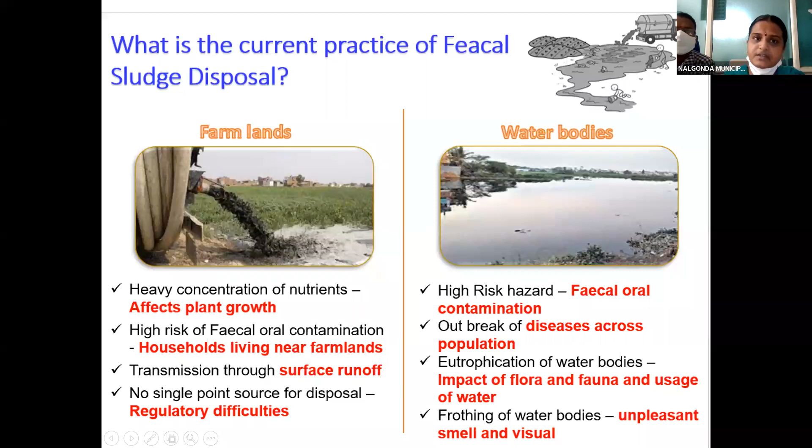If fecal sludge is treated - this is our fecal sludge FSTP located in Nalgonda municipality - if fecal sludge is treated properly, it can be utilized.

There is need and preference for how important it is to people, how this reduces smell and improves the visual display of outputs. Our major interface is zero sludge disposal, to reduce health and environmental risk.

We have a very centralized, dedicated place, easy to regulate from our ULB to the FSTP. This gives economic viability, getting revenue generation from end products.

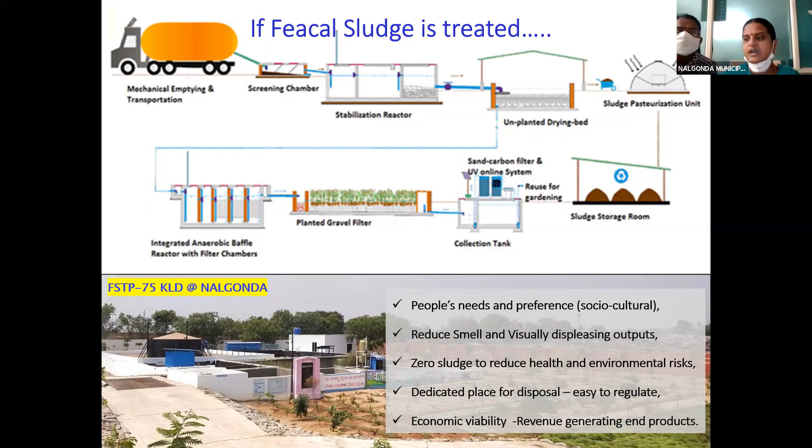Majorly, our project objectives are basically to establish an independent fecal sludge treatment plant as a pilot project, to ensure good O&M of sanitation infrastructure, which leads to reduction of risk to public health and environment.

To treat sludge to prescribed reuse standards, to produce hygienic and safe byproducts for reuse. A major objective of our ULB regarding the FSTP is to achieve the vision of making urban areas ODF, and we are in the race for GFC 3-star rating.

To achieve our strategy based on the policy of Telangana State G.O. MS. 176, the FSSM policy, which was enabled by CDMA Telangana State.

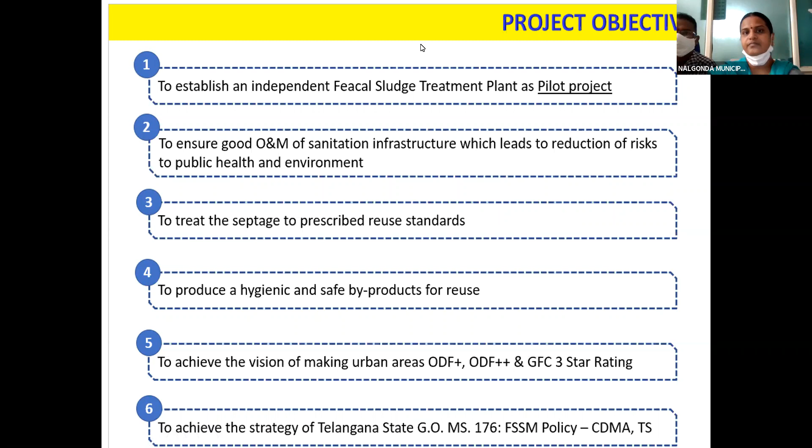So moving to our basic infrastructure, the Nalgonda profile: we are located 90 kilometers southeast of Hyderabad, the capital of Telangana. Our civic status is special grade municipality, an Amrut city.

The population comes to present about 2 lakh population. When coming to our area, it's about 105 square kilometers. We have covered about 48 wards, a vast area in total.

When our toilet system is functional, we are the ODF-free city, and also if you see the water supply and sanitation status, we have 100% coverage in the AMRUT city. Coming to the urban underground drainage system, under the UIDSSMT scheme, we have proposed

2 STPs, treatment plants, which have models of WSP and MBBR. In WSP, it is about 17.16 MLD capacity. Since this capacity, we have covered total core area completed, but still it is in the functional stage, like we are collecting the sewage from all the wards and bringing it to functionality.

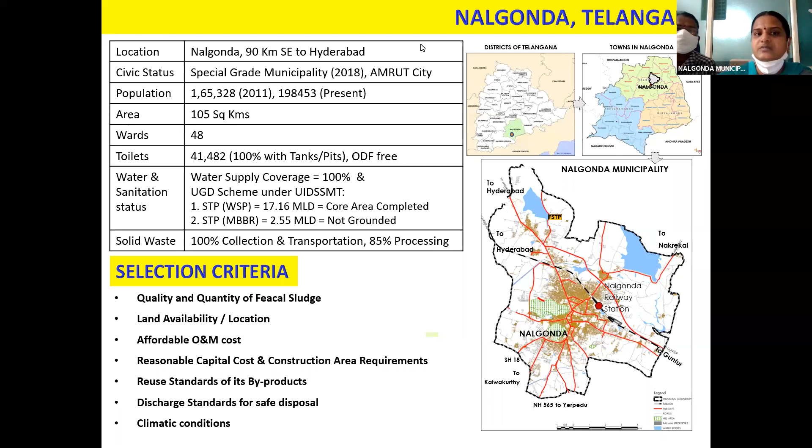Please look at the site's layout plan, where the site area is about 1 acre and the plant area covers about 840 square meters. Coming to the capacity, our FSTP capacity is 75 KLD, and the site developer is CGR JV Private Limited, a Hyderabad-based contractor.

The development mode is PPP mode on DBOT hybrid annuity basis. It is a lease period of 10 years, which we are contracting with them. Compared to the capital expenditure, the total site FSTP has been constructed within a capital expenditure of 1.75 crores, and O&M is expected for the first year to be about 0.85 lakhs.

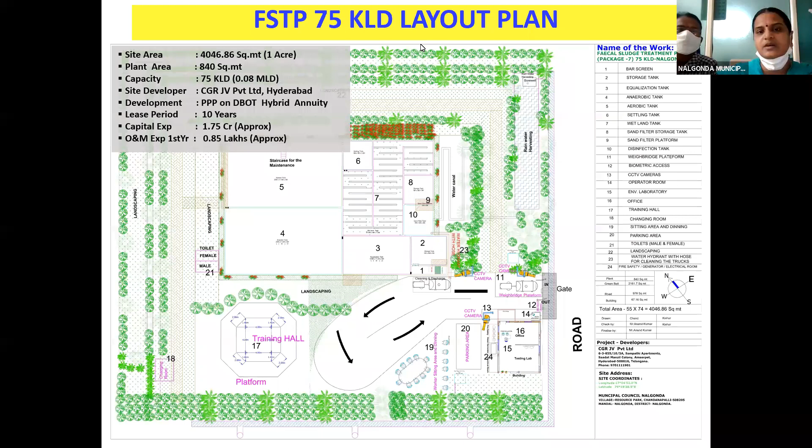Coming to the treatment approach, we see the treatment procedure starting from the equalization tank to the anaerobic tank, later from the E-cell reactor to the aerobic biocleaner tank, the functioning system and the biocleaners, where we are focusing on zero sludge treatment. In the E-cell reactor, the COD levels would be decreased up to 70%. Coming to the biocleaners, COD would be decreased from 70% to 95-97%, where we could finally give only zero sludge from the treatment, the output being only zero sludge.

Maybe a slight, less sludge would be produced, but it is not much in terms of utilization. But the treated water which we are using from the treatment is 90% utilized for us.

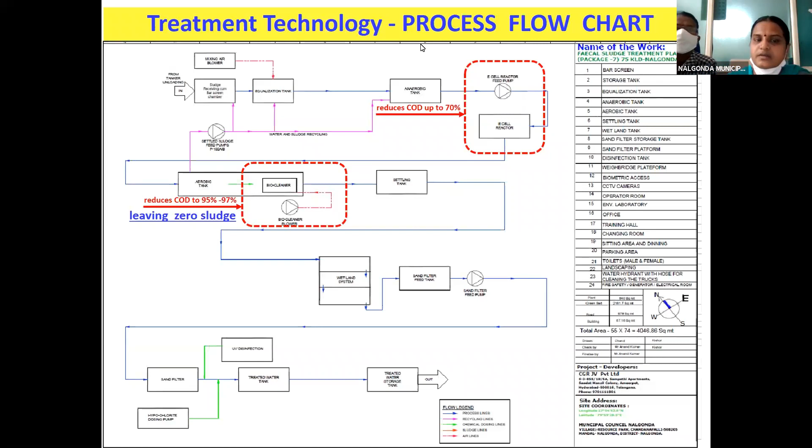When coming to our present treatment procedures, there are 9 stages of treatment where the major aspect is how it is designed for zero sludge procedures, and the operational timings where each treatment procedure is functioning, including the HRT rates.

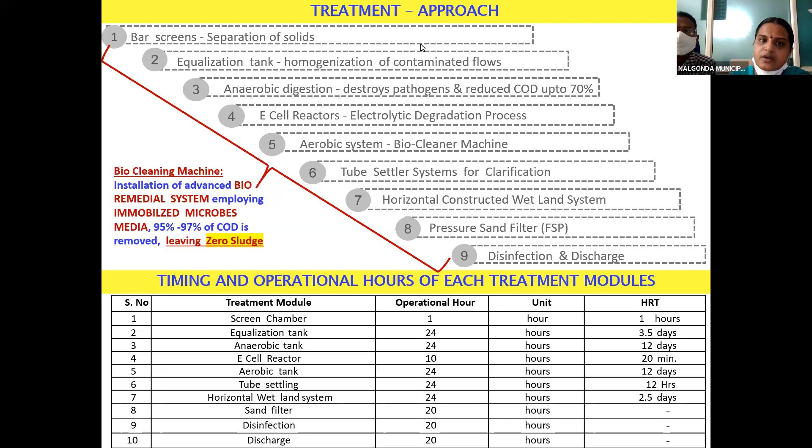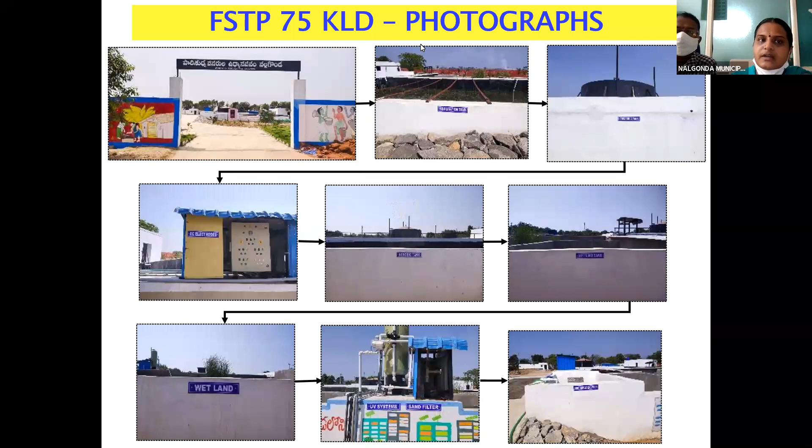Let's go to the screens, how the functionality works from screens to equalization tank. Coming to the bar screens, these mechanical filters are utilized, and the equalization tank has two main objectives: flow control and homogenization of contaminated flow, where coarse diffusers are installed at the bottom and blowers are installed on the surface for agitation of the contaminants coming into this equalization tank.

The main specialty of this equalization tank is that during peak hours, the septage comes at high rate. While the septage comes in, this equalization tank stores the septage in its chamber and lets it out during non-peak hours when there is little incoming sewage.

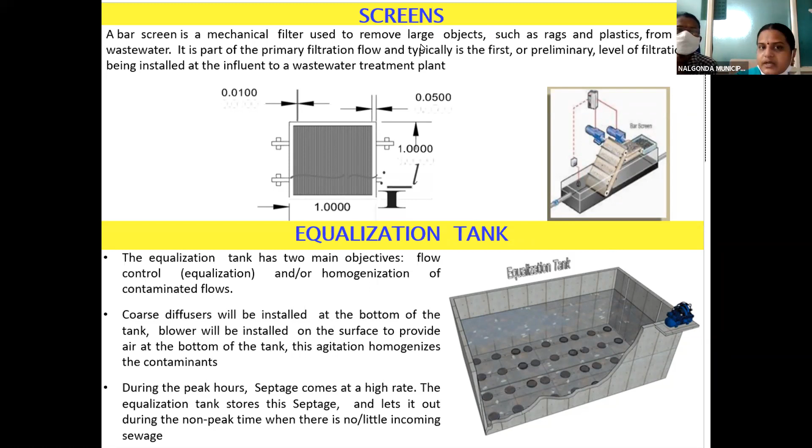Coming to anaerobic digestion, it is a collection of processes by which microorganisms break down biodegradable material in the absence of oxygen. In this whole process, the solids are decomposed into stable substances. This digestion reduces the total mass of solids, destroys pathogens, which finally results in reduced COD levels up to 70%.

When we consider anaerobic digestion, if we take about 100 kgs of COD influent, from 100 kgs of COD influent, it is processed in the anaerobic digestion.

It releases about 40 to 45 cubic meters of biogas, and effluent will be 10 to 20 kgs of COD, leaving 5 kgs of sludge, leaving about 70% of methane gas.

When coming to the E-cell reactor, it is a degradation process for destruction of organics in the wastewater and removal of the same as suspended impurity through the combined process of electrolysis and electrocoagulation.

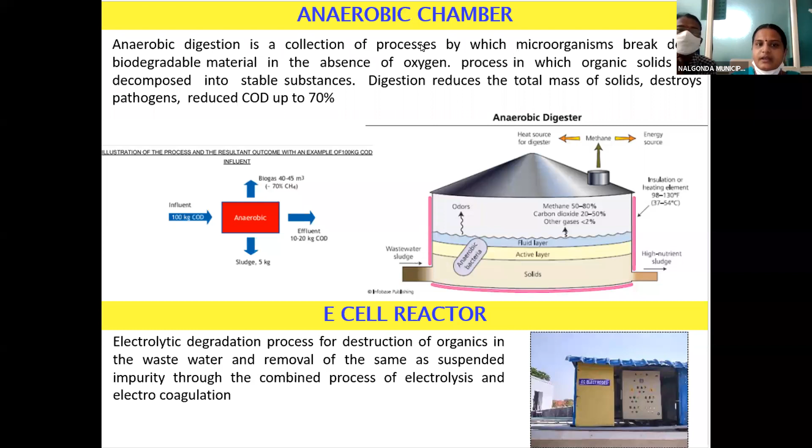This comes to the aeration tank, which functions at the heart of the treatment system. The bulk of treatment is provided here, employing microbes and bacteria for the process. As I explained before, in this same section the COD levels would be reduced from 95 to 97%, leaving zero sludge, which is the main content of our treatment plan.

Like we are releasing, leaving only zero sludge. So coming to the effluent of the aerobic tank, it is channelized to tube settling tanks, and returns are provided to the equalization tank and anaerobic tank to provide partial treatment process. In this process, these microorganisms are facultative and they can survive in both presence and absence of oxygen.

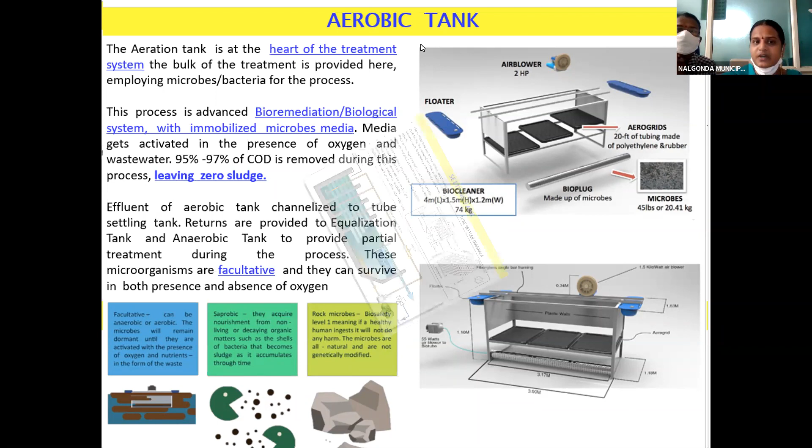Next, coming to these settling tanks, these tube settlers are the main system where the available suspended solids in the treated water separate automatically from the liquids. Through these tube settlers, these solids are separated, and this is the main content where we could get treated water.

There is one inlet channel to the unit. A lamella pack is installed at the both sides of the inlet channel. Automatic air pipes are provided at the bottom of the tube settling tanks. At the bottom, there will be sludge grit sedimentation chamber is provided, and the outlet is provided on the other side of the inlet.

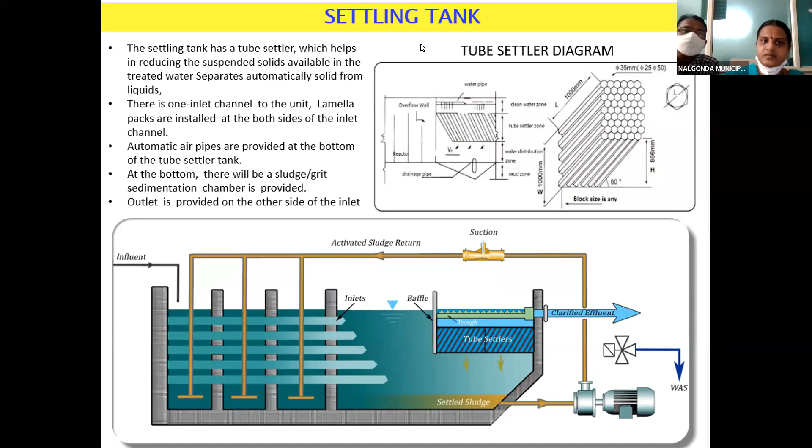Ma'am, sorry to interrupt you. Could you please continue the next procedure? It's horizontal subsurface flow, sir? Ma'am, could you please conclude the presentation because we are running out of time?

Majorly, the O&M which we are concluding is power consumption. We have installed about a 15 kW solar power plant under the net metering scheme, which will generate 67.5 kilowatts per day. Since it is a pilot project, the developer is also planning for solar street lights yet to be installed, as it is in the plan.

They are about to make it within 2 months. It saves more on power consumption, so that this current can be utilized in the treatment facilities.

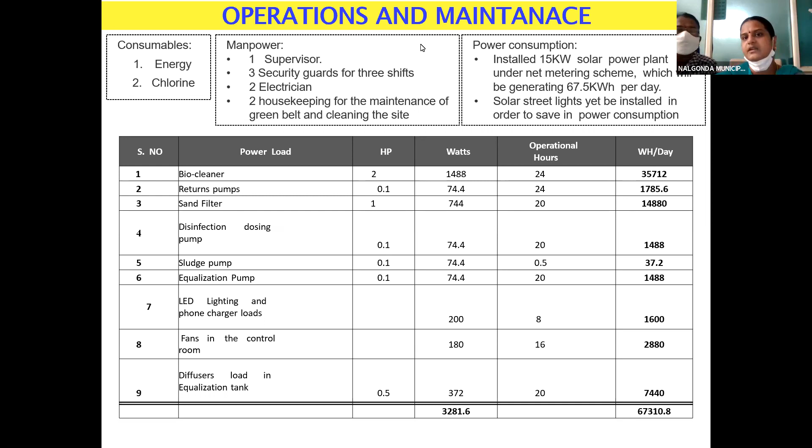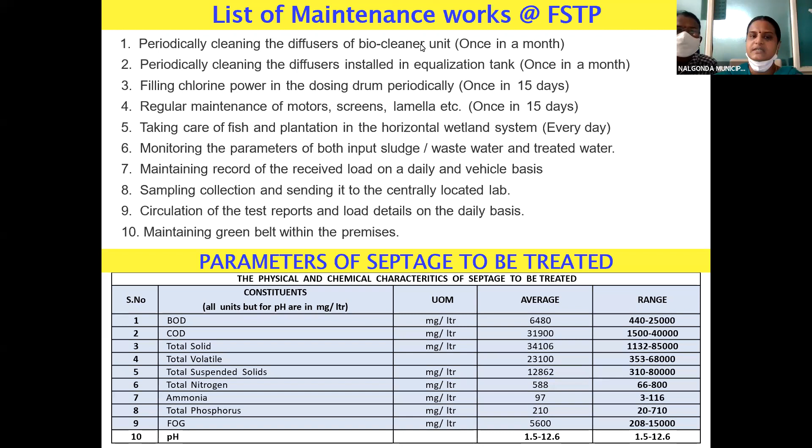These are the parameters of the septage to be treated. After the treated water comes, we took test samples, and these test sample results, on average, are as per the limits of CPCB, sir, which we derived from the results.

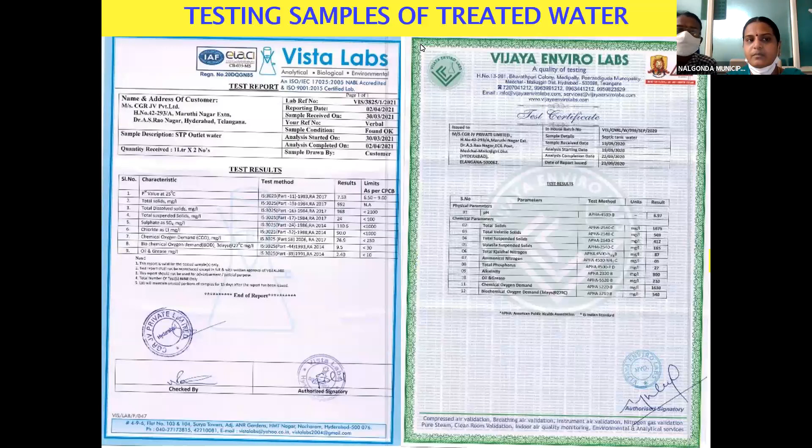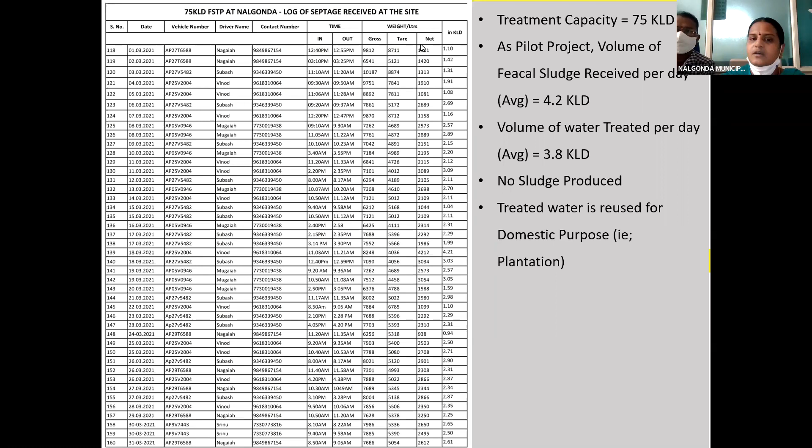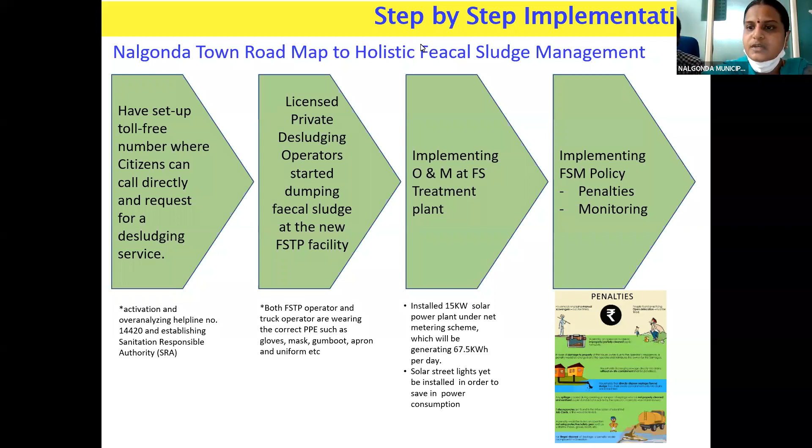Later, the next step is implementing O&M at the FSTP. As I mentioned earlier, how this power is utilized by the FSTP. Implementing the FSM policy, we are collecting penalties from consumers and also from desludging operators who are violating the rules.

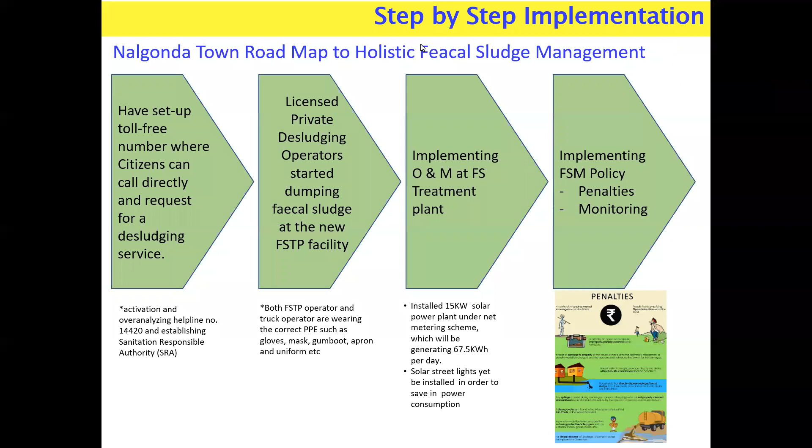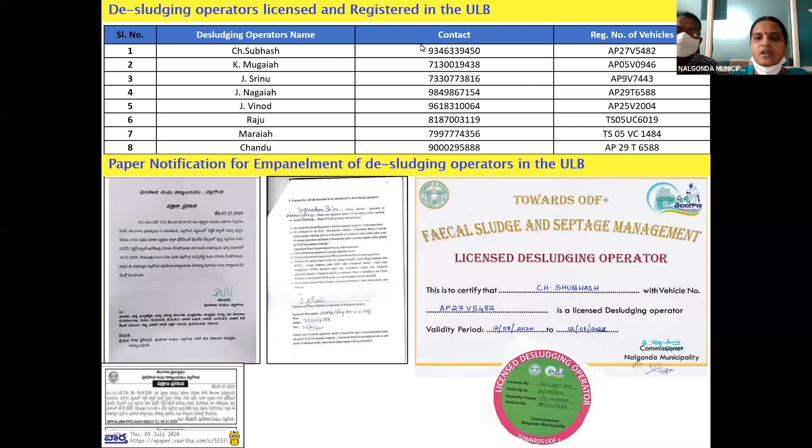Here are the conditions where we are, and how these desludging operators empanel in our ULB. We recently did this last July. These are the posters, like we are producing IEC activity. We are enabling in our ULB many campaigns regarding this IEC activity, making everyone aware that you have to utilize the septic tank desludging operators to empty your septic tanks, sir.

Thank you, sir. We are ending with our presentation.

Any questions? I have a very simple question. Number one, how are you measuring the outcomes of your excellent effort? Number two, what is the process of getting the citizens' feedback into the system? Our voice is not audible, sir. How are you getting the citizen feedback into the system? And number two, how are you measuring the outcomes of your excellent effort?

So regarding the citizen feedback, we have a citizen service monitoring system. We have an app called Citizen Buddy. All over Telangana, each individual ULB has their own app, like ULB app Citizen Buddy, where we would receive feedback and also the complaints which they would raise in the citizen feedback. It is an app produced by the Telangana state, where we could get the feedback, sir.